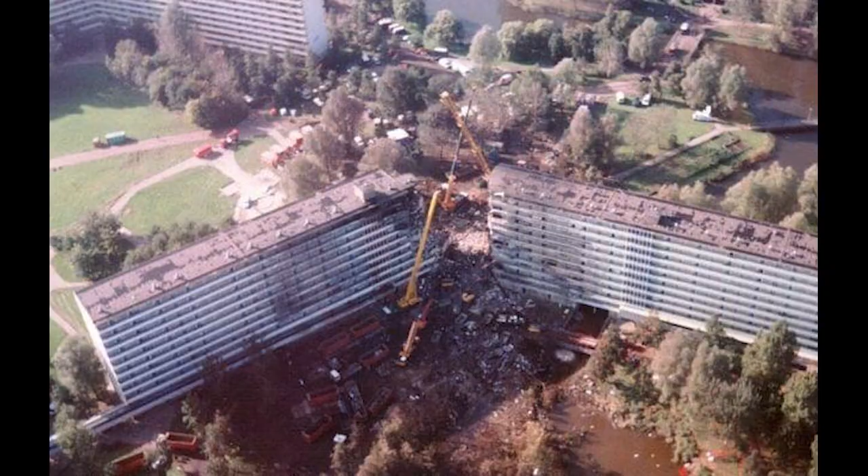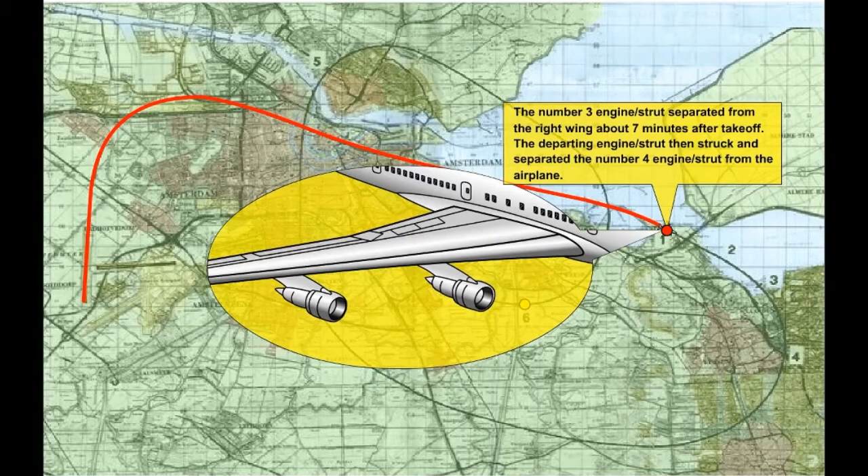This animation shows the flight path of El Al Flight 1862 right before the accident. The number 3 engine strut separated from the right wing about 7 minutes after takeoff. The departing number 3 engine strut then struck and separated the number 4 engine strut from the airplane. The leading edge of the right wing also sustained substantial damage. This is the location where the number 3 and 4 engines landed.

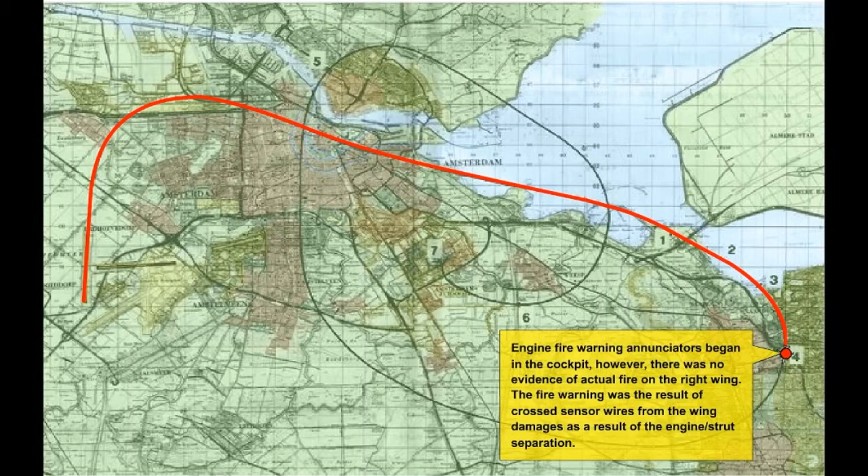The flight crew made a mayday call and reported engine problems. Air traffic control instructed the flight crew to turn around for an emergency landing. Engine fire annunciations began in the cockpit; however, there was no evidence of actual engine fire on the right wing. Investigations have revealed that the fire warning was actually the result of crossed sensor wires from the wing damage as a result of the engine strut separation.

The flight crew was able to maintain control of the airplane for an extended period of time. The flight crew then experienced problems with the right wing leading edge flaps. However, the flight crew was still able to maintain control of the airplane for some time and distance.

The flight crew experienced flight control problems when they attempted to extend the flaps to slow the airplane down for an emergency landing. As a significant portion of the right wing leading edge flaps was missing, and there was substantial damage to the hydraulic and pneumatic systems in the area, an extension of the leading edge devices caused a large lift asymmetry, which led to a roll to the right that became uncontrollable.

The number 3 engine is inboard and the number 4 engine is outboard. After the mid-spar load paths, R3 and R4, and side link load path R5 of the number 3 engine strut failed, the engine strut became statically unstable and oscillated from side to side until the upper link R1 and the diagonal brace R2 failed. Following the failure of all the noted load paths, the number 3 engine strut separated from the right wing.

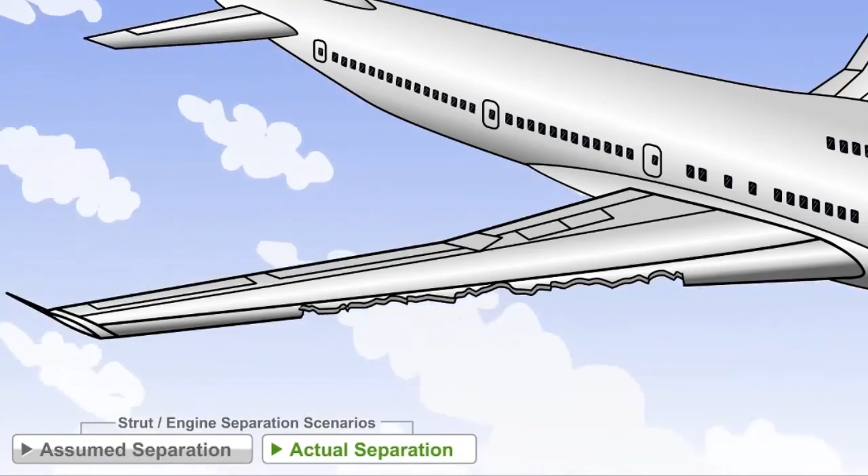With the damage to the leading edge flap and the hydraulic system, the flight crew was unable to control the airplane when they approached the runway for an emergency landing. The airplane rolled when they lowered the flaps.

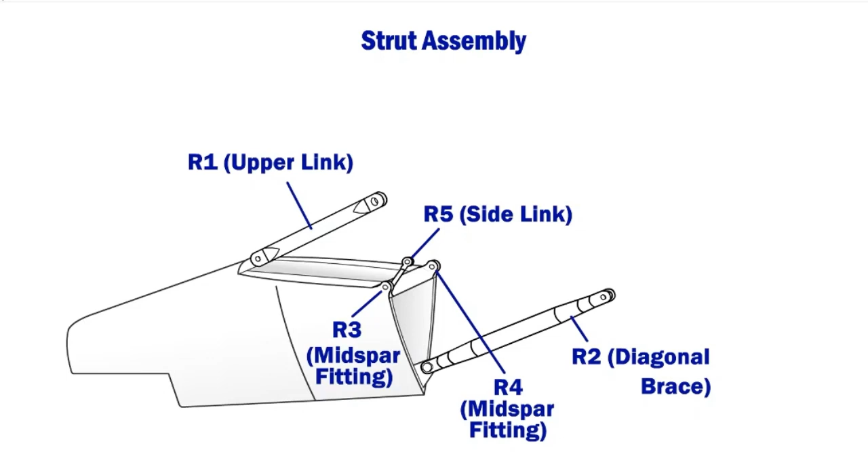This animation shows the failure sequence of the number 3 engine strut-to-wing load path prior to the separation. The strut is attached to the wing via 5 load paths, R1 through R5. The engine is attached to the strut at the forward and aft engine mounts. The strut is designed for controlled separation from the wing in case of an overload condition to prevent damage to the wing structure and systems.

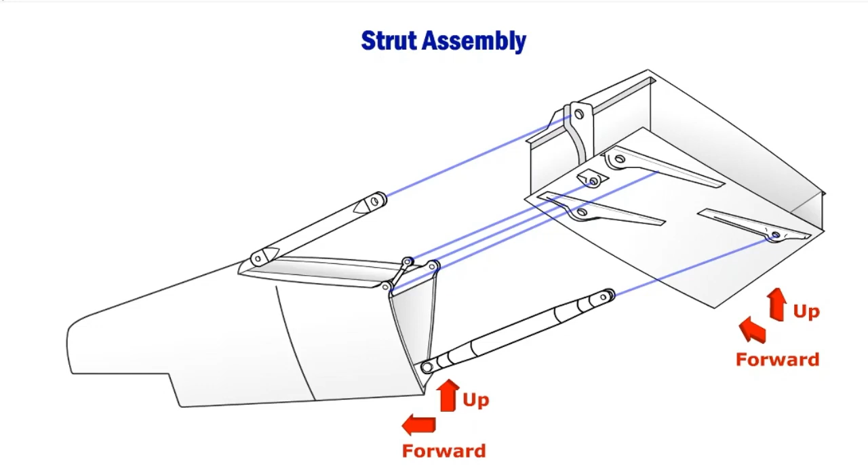This is achieved by equipping each of the load paths with fuse pins. This view shows how the strut is attached to the wing in normal conditions. All 5 load paths, R1 through R5, are intact.

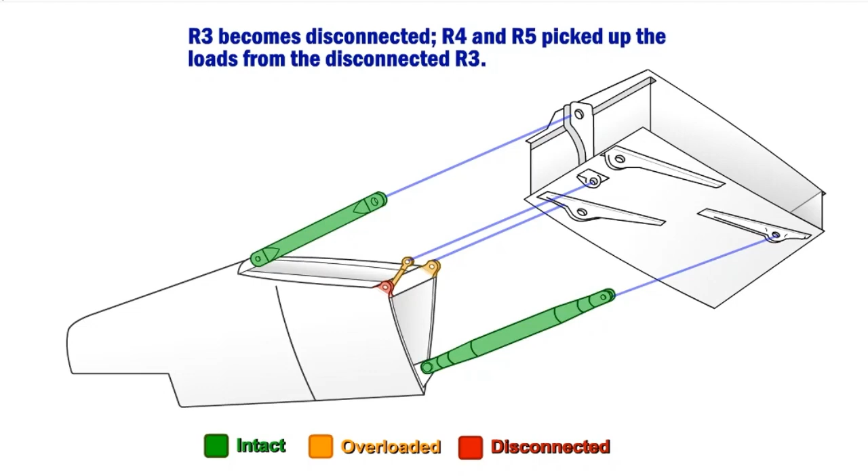This view shows that R3 failed and disconnected due to the failure of its fuse pin. The loads reacted by R3 are now redistributed to R4 and R5. R4 and R5 are overloaded as a result.

This view shows that R4 and R5 failed and disconnected as a result of the overload. The loads reacted by R4 and R5 are now redistributed to R1 and R2. The strut is now statically unstable as side loads are not being reacted by R3, R4, and R5. R1 and R2 are overloaded as a result.

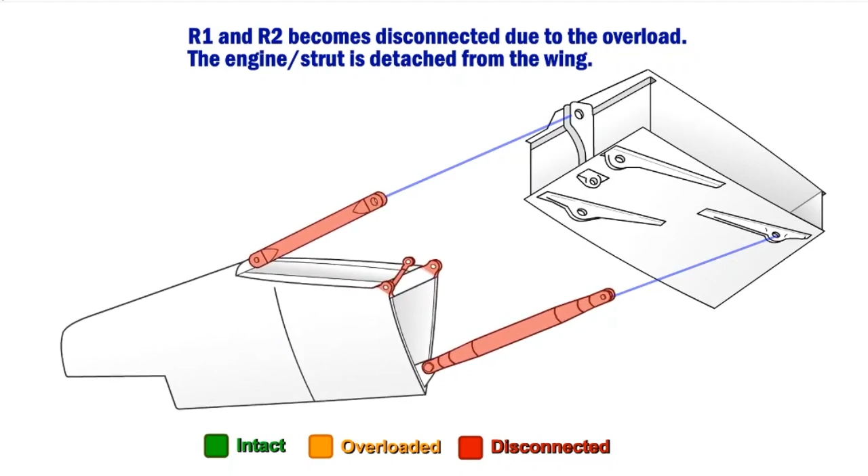This view shows that R1 and R2 failed and disconnected as a result of the overload. Subsequently, the engine strut departed the plane.

In response to a series of alarming accidents involving 747 airplanes operated by various airlines, including El Al, China Air, Evergreen, and Air India, the manufacturer of the Boeing 747 aircraft embarked on a mission to enhance the safety of its fleet. At the heart of this effort was the development of a redesigned strut, a critical component connecting the engine to the aircraft's wing.

With the Federal Aviation Administration, FAA, mandating the retrofit of these improved struts on all 747 aircraft in 1995, the aviation industry witnessed a significant leap forward in safety standards. Thus, the 747 Strut Modification Program was born, a monumental undertaking requiring the installation of newly designed struts on every in-service 747 aircraft. The redesigned struts boasted a fail-safe design for all engine attachment points and exhibited remarkable damage tolerance, even in the event of a single strut-to-wing attachment failure.

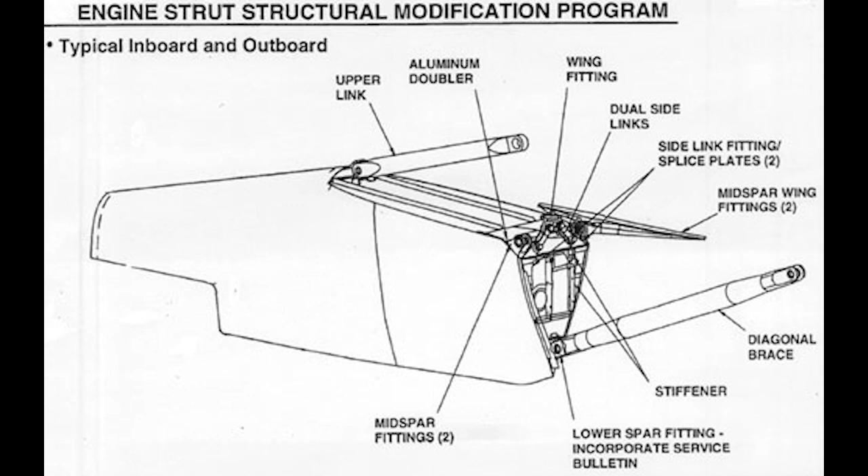Though still incorporating structural fuse pins, these struts were now fortified to shield the wing tank from damage during ground impact, thereby mitigating risks associated with catastrophic failures. In the event of a complete failure of a single strut-to-wing attachment where no load transfer was feasible through the joint, the remaining intact structure bore the redistributed loads. Rigorous crack growth analyses were conducted to assess the integrity of the most critical remaining structure, with inspection intervals strategically determined to detect any emerging issues before they reach critical levels.

The redesigned struts incorporated a host of enhancements aimed at bolstering load-carrying capabilities and fail-safety measures, from a more robust design for increased strength to the addition of dual-side links, from the replacement of aluminum mid-spar fittings with titanium counterparts to the integration of backup structures within the wing box. Each modification aimed to fortify the aircraft against potential vulnerabilities.

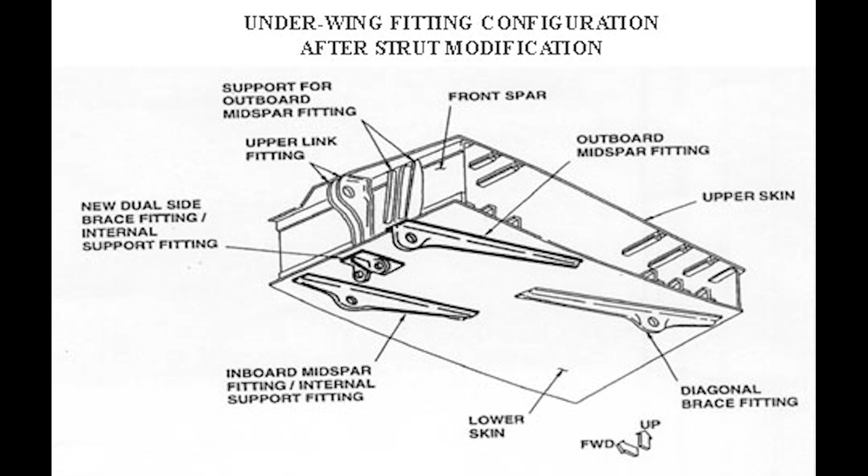Moreover, an extensive inspection program rooted in the principles of damage tolerance was implemented to ensure the continued airworthiness of the struts. This program addressed not only routine inspections, but also specific checks for struts subjected to hard landings, high drag situations, and turbulence exceedances. With corrosion resistance practices also factored into the equation, the redesigned struts represented a monumental leap forward in aviation safety standards, underscoring the industry's unwavering commitment to passenger safety and aircraft reliability.